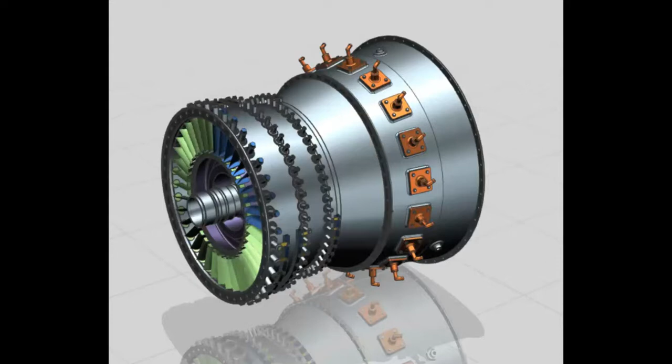An engineering analysis for these kinds of models is typically done on a two-dimensional slice of the geometry, which we can easily create through the integration with NX CAD. The engineer begins by setting up the analysis in NX CAE to use the NX Multiphysics environment for a coupled thermal structural analysis. Then the engineer begins meshing the cross-section geometry.

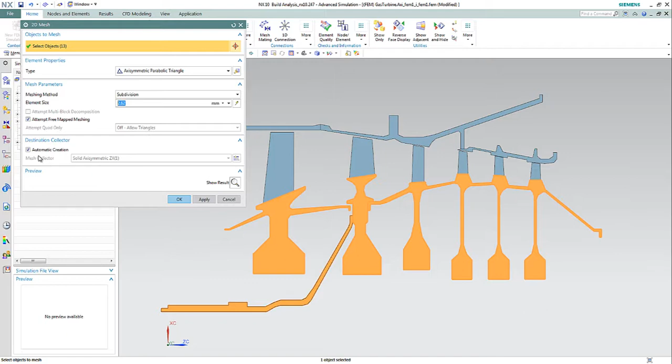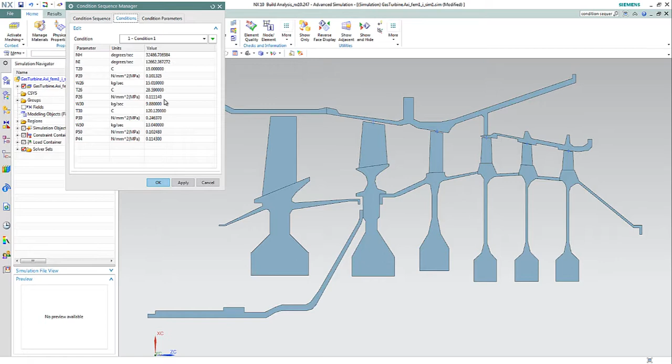Since this is a 2D model that's revolved around the horizontal axis, the engineer uses axisymmetric elements to represent the disks and casing, and plane stress elements for the blades. Since this is a transient analysis, where the engine passes through a mission profile such as takeoff, cruise, and landing, NX CAE can help the engineer to easily set up the various condition sequence parameters that will affect the engine at each stage of the flight.

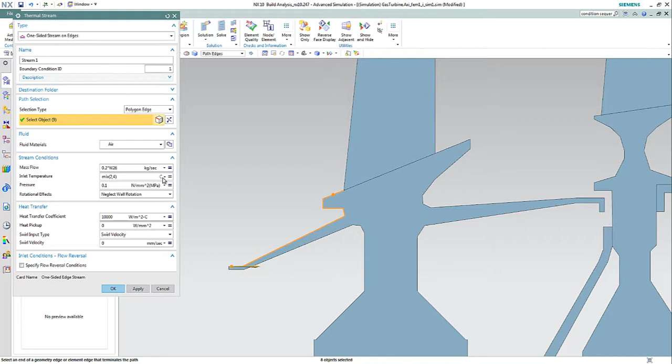Setting up boundary conditions for such complex models can be a challenge with traditional tools, but NX CAE helps to simplify the process with advanced thermal boundary condition commands that can reduce definition time by up to 75%. The engineer can even use expressions to define interdependent boundary conditions, which can even be evaluated at solve time.

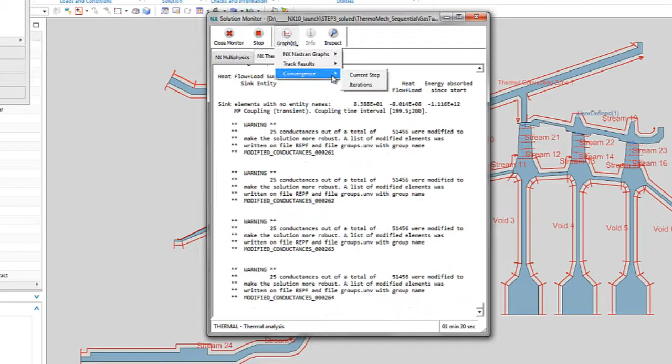With the analysis model defined, the engineer then kicks off the solve, and the solution monitor will simultaneously track solution progress for the coupled structural thermal solution between NX Nastran and NX Thermal. The engineer can view graphs to monitor convergence for both the thermal and structural solutions, and he can also monitor the progress of key results.

Post-processing of the results in NX CAE then allows the engineer to understand deformation and temperature of the compressor at various stages of the mission profile. And new result probe capabilities in NX CAE provide the ability to use powerful expressions to create new, measurable result types.

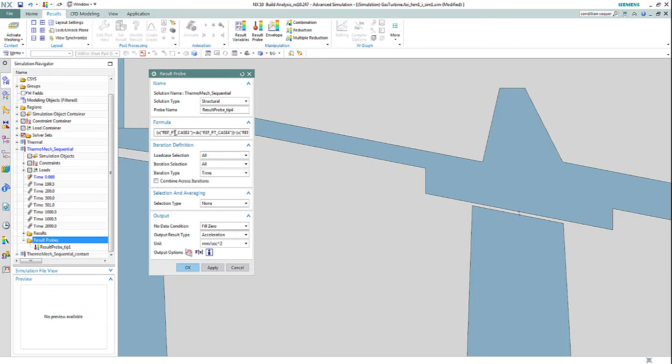In this case, the engineer creates a result probe to assess and graph blade tip clearance between the engine blade and outside casing. NX CAE, delivering an efficient, integrated workflow to perform complex multiphysics analyses.